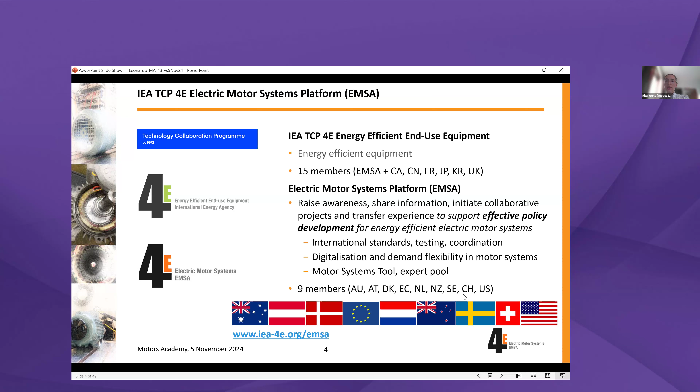Some of the topics that we are working on include international standards, testing, coordination and alignment, digitalization, demand flexibility. We also have a dedicated tool, the motor systems tool, and an expert pool who can help you with the use of the motor systems tool. The 9 members I would like to mention explicitly: Australia, Austria, Denmark, the European Commission, the Netherlands, New Zealand, Sweden, Switzerland, and the US.

EMSA also works on different levels of impact, meaning individual awareness. So with our newsletters, with our information materials, we target individuals, professionals working in this field. And also we target the company policies, a company level. Above that are the national policies. The primary goal is, of course, to help policymakers design and implement effective policies. And the further layer are the international standards. EMSA is actively involved through some of its members as national experts in different international standardization committees and groups.

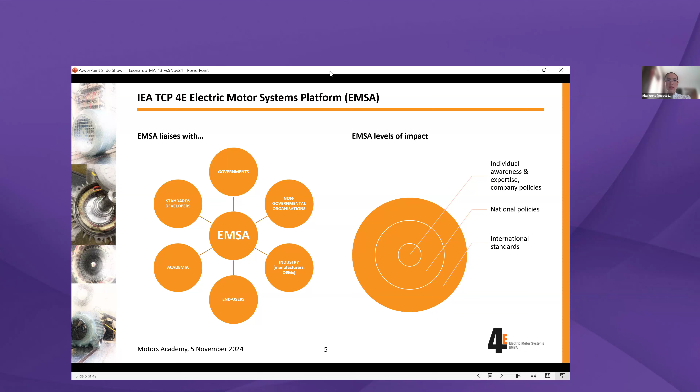Here we also have a link to the EU MORE project, some of you may be familiar with. We address the future of efficient motor systems, and as I mentioned before, we offer some tools for users and other professionals. Then another subject is technology monitoring, like digitalization of motor systems or demand flexibility in industrial motor systems, as well as silicon carbide converters with industrial motors.

Last but not least, we have the Knowledge Hub, which is, on the one hand, the dissemination of our work results, and on the other hand, we are also keen on having continued dialogue with industry, meaning industrial associations, and this we call the Industrial Bridge.

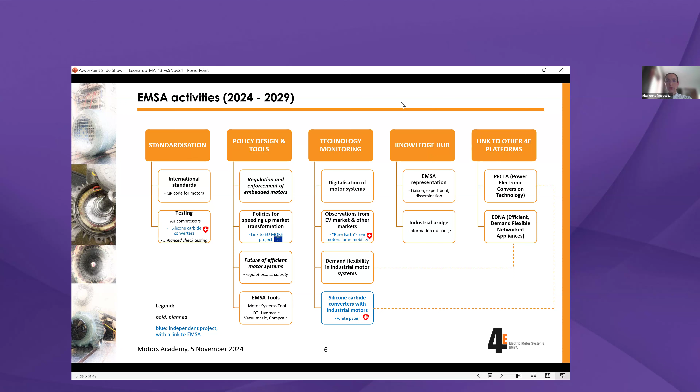Within 4E, there are also other platforms. Some of them we collaborate with on selected topics, like the Power Electronic Conversion Technology platform or the Efficient Demand Flexible Networked Appliances platform. This is just a reminder.

I think everybody is familiar with this, what we mean with electric motor systems and what EMSA's primary target is, which is the system in its entire complexity, meaning the variable frequency drive, the motor, the mechanical equipment, if there is one, and the driven application. And the average savings potential on the system level are between 20 to 30%, so we work on the system level.

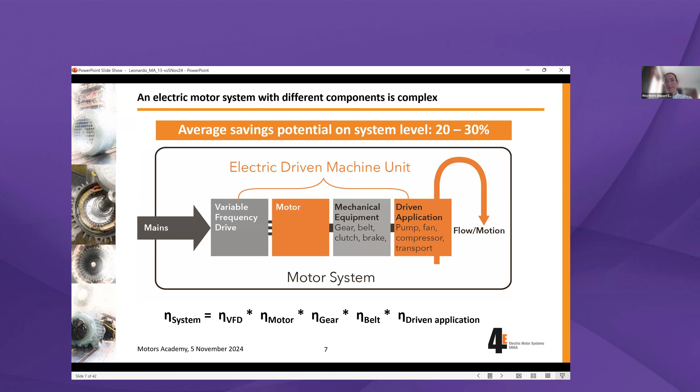Thank you, Rita. I take over from you. I will start with, and then I first have to share the same presentation then from my side.

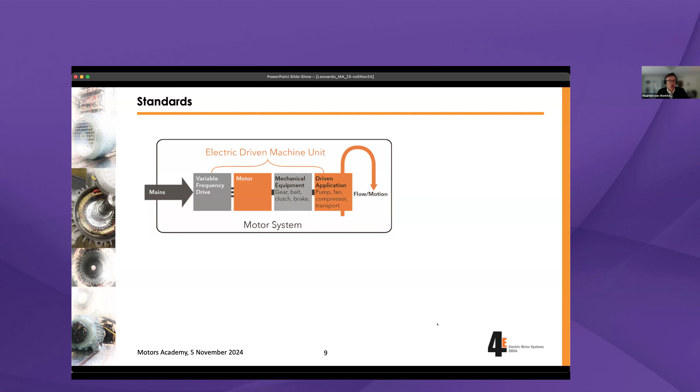I will start with some more in-depth information about international standards and MEPS. First, the same figure as Rita showed. The idea is that I show you the technical background of the different components: on the left, IEC covered standards, electrotechnical standards, and on the right, the mechanical part covered by ISO standards, both through the different individual TCs, technical committees.

Last but not least, I'd like to mention JAG22, a combined, joint advisory group, standing for Joint ISO-IEC, working on the subject of optimized energy and power consumption of electric-driven machine units. What JAG22 does is not making new standards, but gives a platform for coordination and alignment activities, which can then be taken up by the individual TCs.

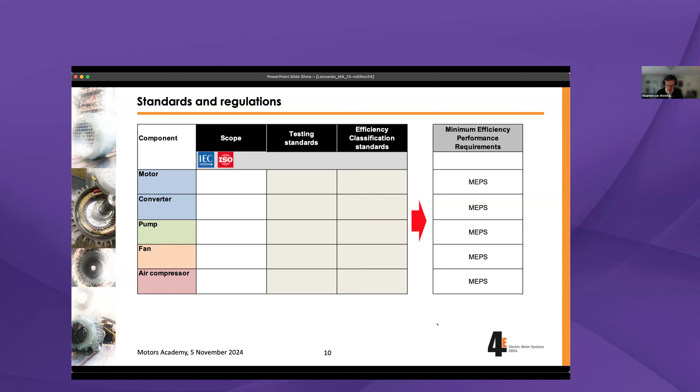So for motors, you now see a number of countries do have MEPS in place, all on the product level. The same goes for the converter, where we see the VSD, the converter, the listed standards. As such, there's only one country or region, EU, which has a MEPS in place for VSDs.

Then when we make the step to the pump, the fan, and the air compressor, what you can see, if you take a look at the testing standard column, all standards are either IEC or ISO, electrotechnical or mechanical. That's not the case for the efficiency classification standard, where for the motor and converter, these are IEC standards only. But when we move to the pumps, you see that we list...

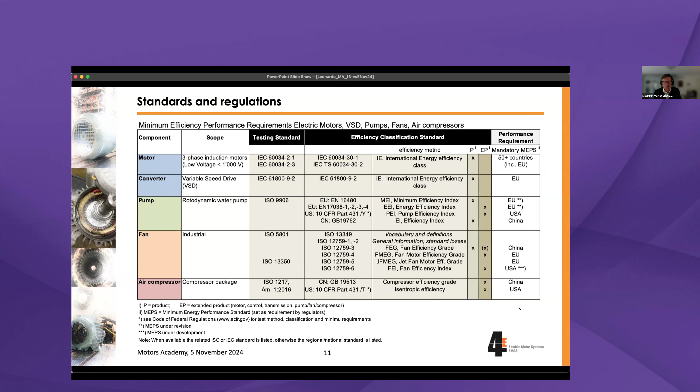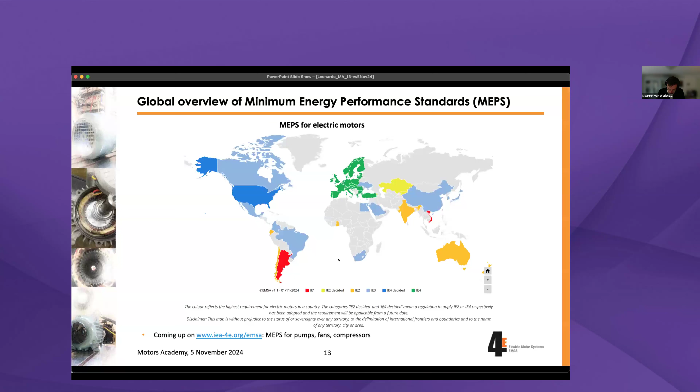So I'd like to quickly step back 8 years and look at the market at that time — how did it look when we talk about MEPS for motors? Here's how it showed: different countries at IE3, IE2, and some at IE1, with a range from 0.75 up to 375. In total, 17 countries had MEPS for motors in place 8 years ago.

None of them had MEPS for IE4. And currently, we see 20 countries having MEPS in place for IE3.

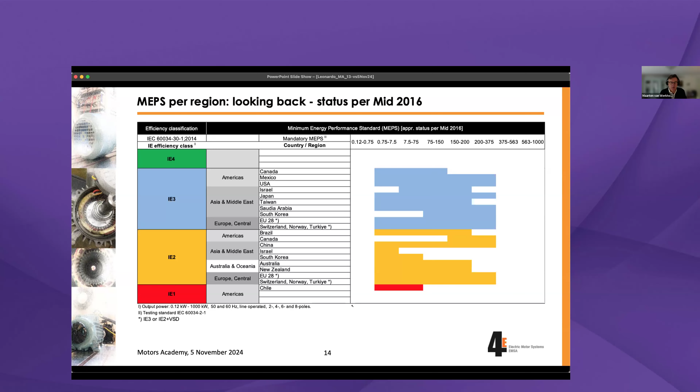So that brings me to a little poll. And then I'll switch to Rita, who will take us over from here. Rita.

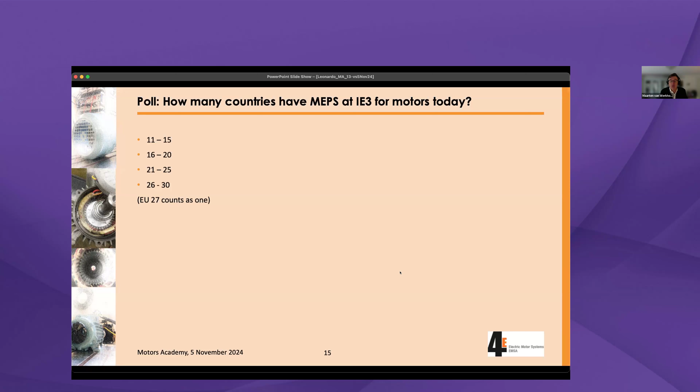There we are with the results, and I give the floor back to Maarten to comment. Thank you, Rita, and thank you all for voting. The answer is 20, and I'll show you right away — I close this poll, so the majority did make a good guess. This is the current status of MEPS for motors. The question was how many countries have MEPS in place at IE3 level, and the answer is 20.

So 20 countries have MEPS in place at IE3. I had to take a good look because I'd also written down the total number of countries with MEPS in place at either IE1, 2, 3, or 4, and that number is 29. As you recall, the total number of countries having MEPS in place 8 years ago was 17, so that's an increase of 70% — a huge increase in countries implementing MEPS for motors. The countries with MEPS in place at IE3 level cover approximately 80% of global electricity use for motors, the biggest chunk of electricity used by motors worldwide at this moment.

Bear in mind that total electricity use by motors will increase considerably over the coming 10 to 20 years, so that percentage may drop when we take another look in the next decade.

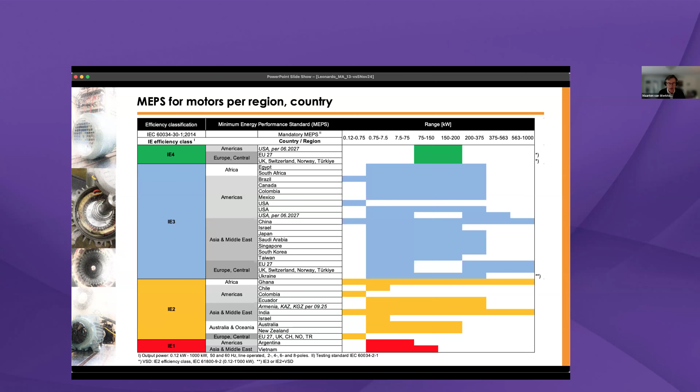I'll go to the next slide, which shows a bit more in detail the different MEPS. First, the MEPS for motors at EU level. What you see here, in a nutshell, is the different motors covered in the EU.

In the middle, you see the section with green, orange, and blue, relating to three-phase induction motors, 2 to 8 poles, continuous duty. Interesting to note is that motors for explosive atmospheres are also covered, and also the IE4, which is new in the world. Those cover 2, 4, and 6 pole motors between 75 and 200 kilowatts.

It also includes information requirements for motors at part load and partial speed, motors and VSDs, and that's also an important addition compared to the old MEPS.

Then also covered are the one-phase motors at the IE2 level, and also the motors for explosive atmospheres, which is the most stringent class for explosive atmospheres. Those also have IE2. And importantly, it covers the full range of the standard, being 0.12 up to 1000 kilowatts.

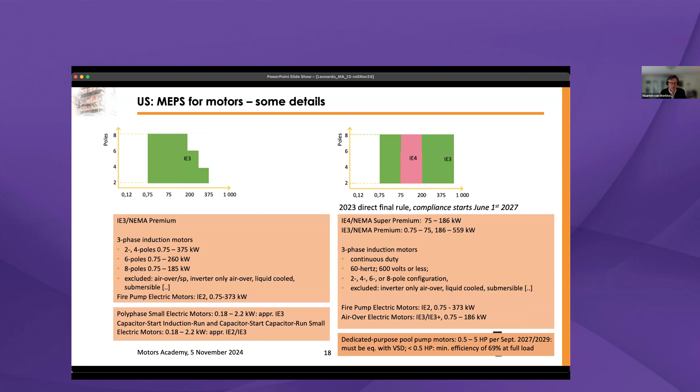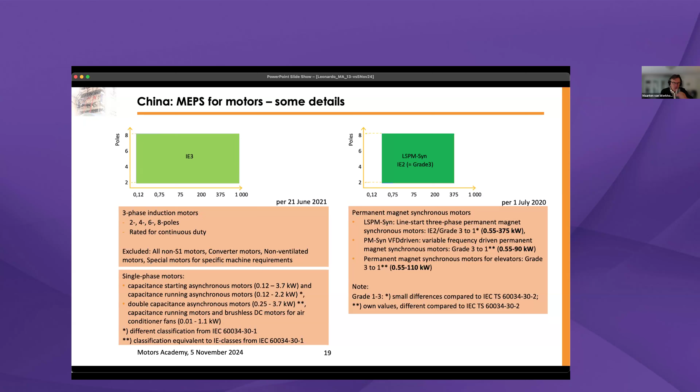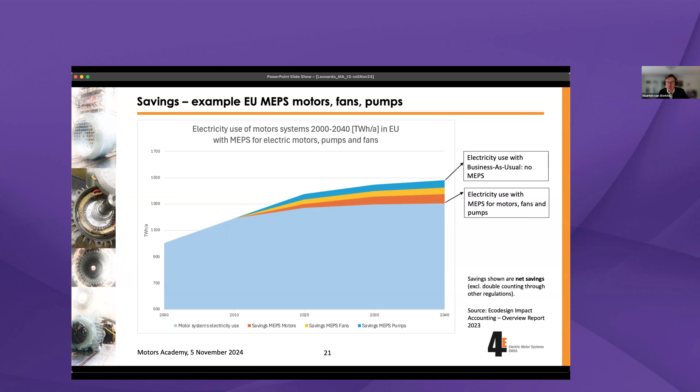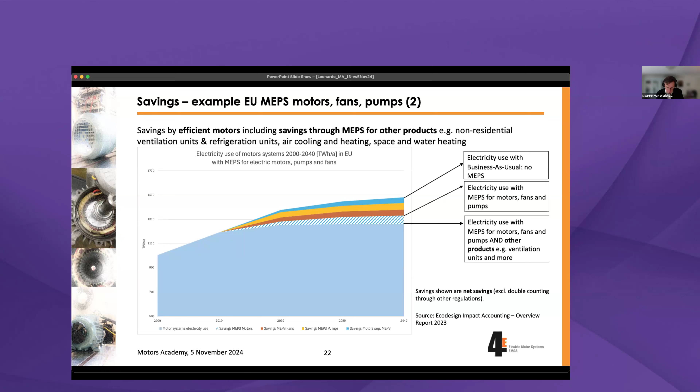That's the case in the EU. So for those countries who want to start with MEPS for motors, it's interesting to bear in the back of your head.

Next, I make the step to fans - industrial fans, MEPS in place in the EU and China. To the far left, China, MEPS updated in 2020. It covers the fan only to a large extent. The different types of fans are listed, primarily or only centrifugal fans and axial fans, different types.

The metric used is the FEG, the fan efficiency grade. But in 2020, a small addition has been made, at least for the forward curved fans, where also the motor and the VSD are included. So a step has been made to move from the fan only to also including the motor and the VSD. Three efficiency grades are defined in China.

In the EU, the revised MEPS has just been published in July this year. You see here also axial and centrifugal fans, the biggest chunk of fans, at least in industry. But we also see cross-flow fans included, mixed flow fans, and also jet fans. So these are not included in the Chinese MEPS.

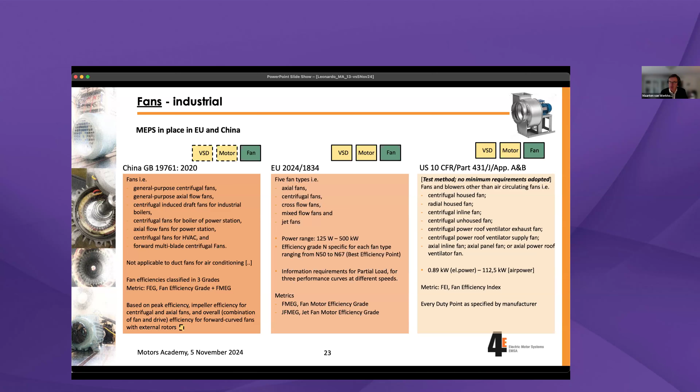Okay, that about fans. Then pumps - clean water pumps, MEPS in place in the 3 big regions. We see the different types of pumps specified, I won't go into that. What I wanted to show here especially is that in the US, the full unit is covered, being the pump, the motor, and VSD. And the regulation covers 3 different configurations: the bare pump only, pump with a motor, and pump with a motor and VSD.

PEI is specified or applicable. And for the EU, currently the current regulation, which is under revision, covers only the pump itself, so the hydraulic part of the pump. And again, here it's a different metric, related to the best efficiency point.

Interesting to note is that the regulation has been under revision for quite a long time. But it looks now that within a year, the new revised regulation will be published. We do have a draft document, but it's still a draft.

And there it shows that the route is chosen, or at least in the picture, to include the water pump unit. So again, the unit being the pump, the motor, and the VSD, in such a way that for these typical applications, only VSD-driven units comply.

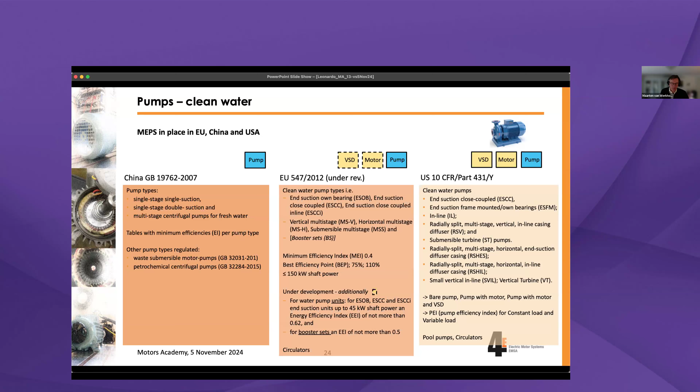Showing here the effect of including the pump unit in your regulation. It shows, in this case, calculation based on the impact accounting again. The orange line shows you the extra savings compared to business as usual, blue, and in green, the current savings with the current MEPS. You see that's a huge difference. So it's very relevant to really make the revision work soon.

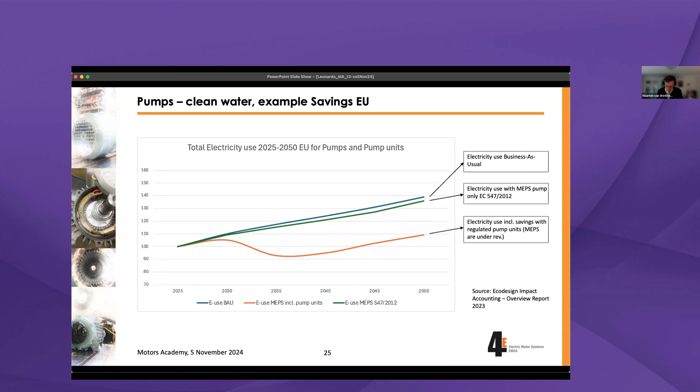Air compressors. Here we see two countries have MEPS in place, being the US and China. Interesting to note here is that both countries cover the complete package, compressor, motor, and VSD, where in the US, it's air-cooled, liquid-cooled, fixed variable speed. They use the package isentropic efficiency with the D factor being able then to differentiate between the total efficiency.

Compared to China, where they apply the specific input power. And you can easily recalculate from specific input power to isentropic efficiency, but in terms of enforcement, it's much easier, and also for end users having to specify the efficiency only instead of specific input power for each type of compressor package.

And in the EU, there's no regulation yet, and there are no plans on short term to make those regulations.

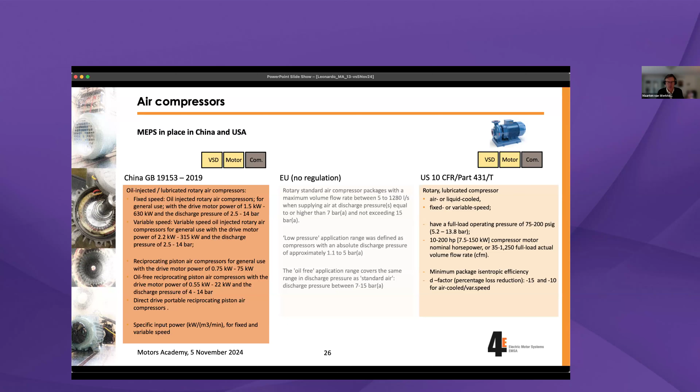Then market surveillance, where the regulator has to monitor and verify if products brought to the market really do comply. And enforcement, to assess and also, if products don't comply, enforce that. So there have to be fines and proportionate actions to expel those products from the market. So that's a whole system of MV&E, and that's essential to get to good MEPS.

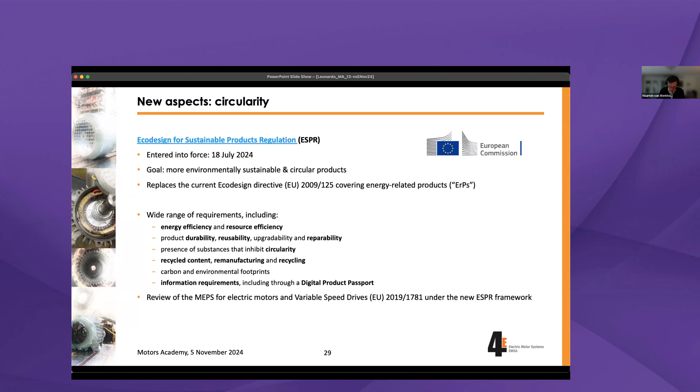Variable speed drives capturing the savings from controls. I mentioned two sources. One is research done by the Fraunhofer Institute, reported at EEMODS in Lucerne this year. It shows a 10% extra savings on the energy use of motors by bringing VSDs to the market. You see a very short figure with fans, pumps, compressors.

It's market research identifying and calculating the actual potential savings by VSDs. It also specifies three potential policy approaches to make this work. First is making VSDs mandatory with all newly sold motors. You can also think of making VSDs mandatory not for motors, but for instance specific applications like pumps. But doing so means adding cost to every product - you have to buy not just a motor, but also a VSD. It has benefits for most end users because of extra savings, but not for all maybe. And there are regulatory issues, how to enforce, how to make it work. So there are many implications by such a policy approach, but it still looks maybe promising.

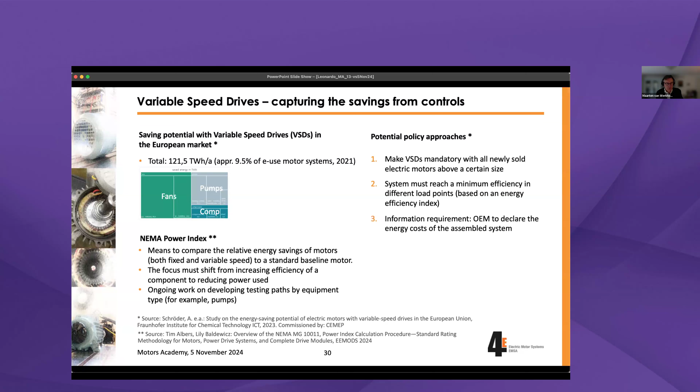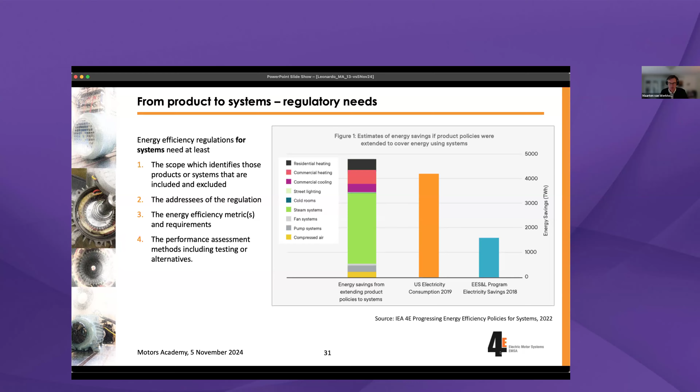Thank you, Maarten. I will share in a moment.

When we talk about awareness raising and capacity building, we are thinking about different stakeholder groups who are all affected, or should be affected, by awareness raising and capacity building. To raise awareness among end users is important so that they are aware of their energy consumption. Digitalization is a helpful tool for this - you can check out the link below. EMSA did a number of publications on the subject of digitalization. End users should be aware of their saving potentials, life cycle costs, and multiple benefits of optimizing motor systems, meaning not only energy savings, but other benefits.

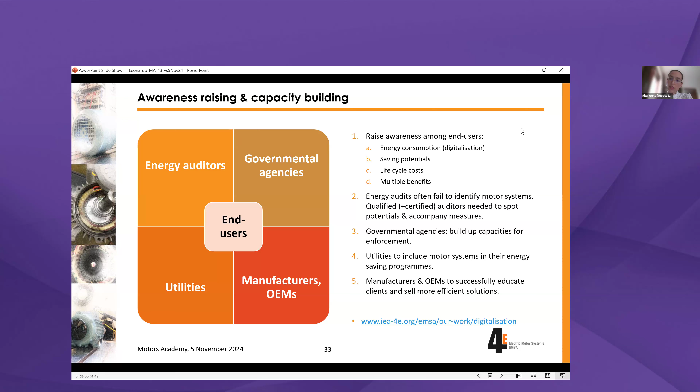Financial support: the goal should be to target system optimization, not only one component, not only the low-hanging fruits. It should focus on the largest potential, typically old, big, oversized machines. Even financial support programs need to be accompanied by dedicated training, tools, and information to reach their target audience. I tried to capture this with this figure, a bit like a darts figure, with the most important point in the middle.

However, all the others are also needed. Some key factors for a successful subsidy program include how to reach the target group, and of course the target group should be aware of the financial incentive available to them. An easy participation in the program, a tangible subsidy, and the qualification of involved consultants are important, since companies very often need external help to optimize their systems, and for this qualified help is needed.

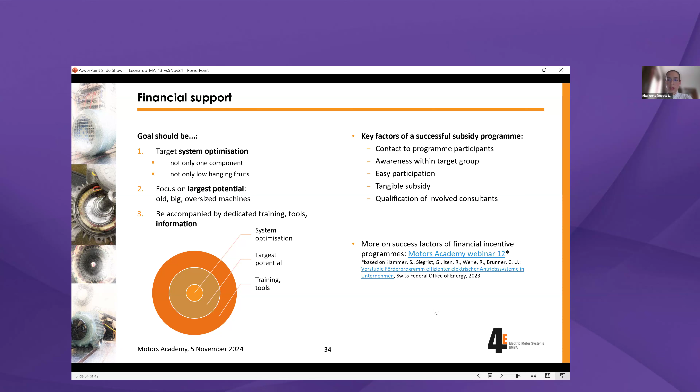The last webinar in this Motors Academy was dedicated specifically to this subject, so if you're interested, you can find more information under this link.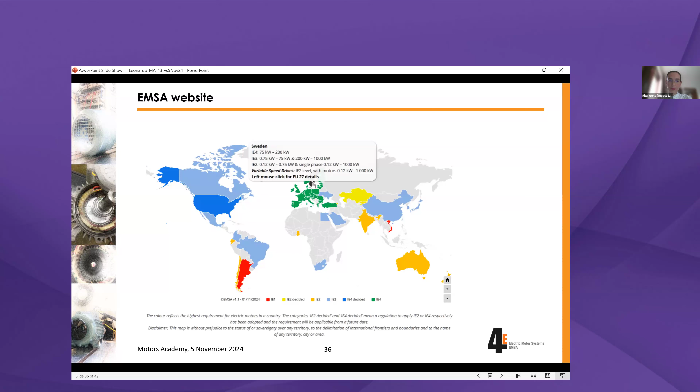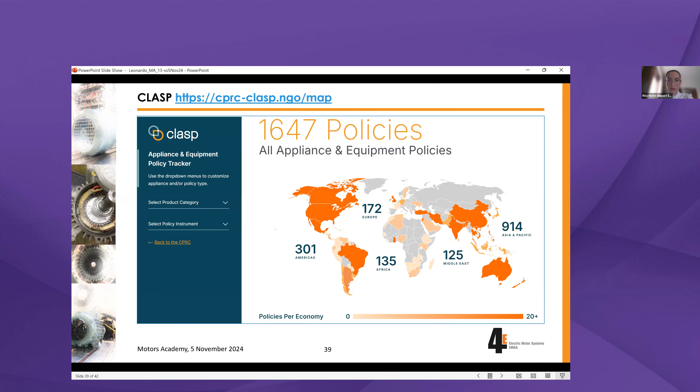Now we jump to the conclusions, and we are running a bit out of time, but I hope you can still hang on for some discussion.

So we see at present that standards serve as building blocks for regulations. The standards for motor systems are being coordinated and aligned under IEC 22, mentioned by Maarten. As the motor system itself is complex, the standards need to align with that too. MEPS for motors evolve and expand in scope, stringency, and coverage worldwide; however, they are getting close to reaching their maximum.

MEPS for pumps, fans, and air compressors are in place in only a few regions and are evolving from a component to the whole unit level. In future, we think the most important issue is how to harvest the system savings. In terms of MEPS, what are the metrics? Next to metrics for efficiency, we can also look at metrics for reducing power. Maarten mentioned the NEMA power index, which goes in this direction.

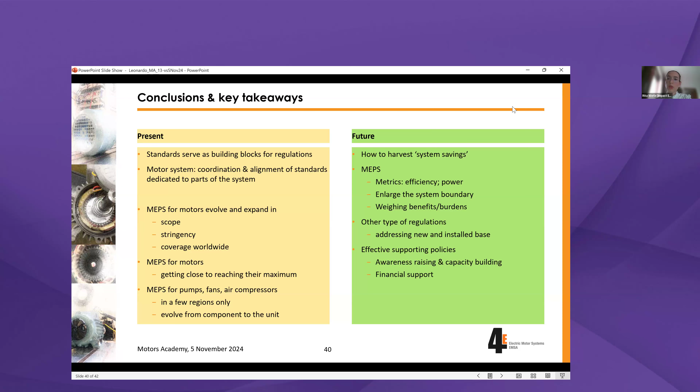We talk about enlarging the system boundary and weighing benefits and burdens. Maarten mentioned, for example, with variable speed drives, that if certain measures are applied, this bears cost but also benefits in terms of savings, and for the regulator, additional effort. Other types of regulations besides MEPS are important for addressing not only new equipment but also the installed base, and effective supporting policies are needed to complement efforts in MEPS.